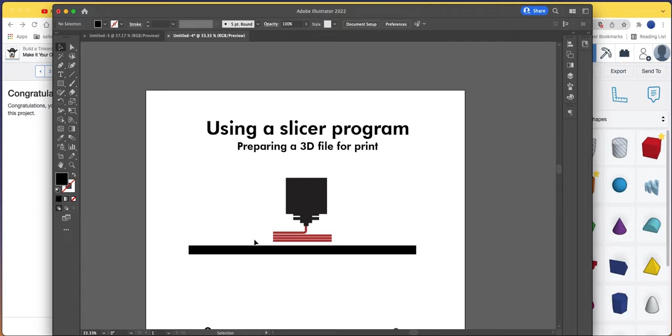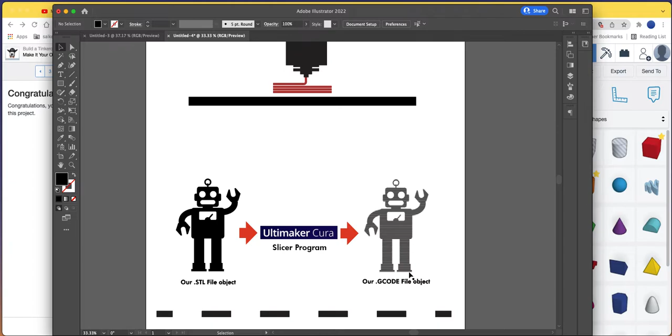A 3D printer lays out simple tiny lines of filament. It gets heated up in the extruder, comes out in noodle form, and gets laid down in the order you specify. So we take a design, like our STL file, save it, and pass it through the slicer program, the one we use is called Ultimaker Cura, to make our G-code file. That's our STL file broken down into a bunch of tiny lines so the 3D printer can plot, coordinate, and print out our design.

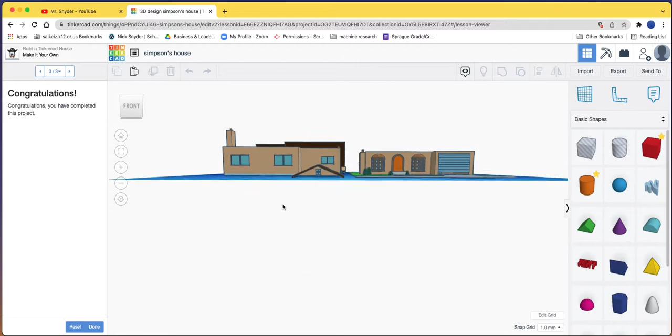Let's go through that right now. I'm going to use my Simpsons house, the house I made, and I assume it will either be the character project or the house project that you guys decide to print out when you get the chance. I think we're probably going to do voting, so only a couple of you will get to do the houses, but we'll use my house as an example today.

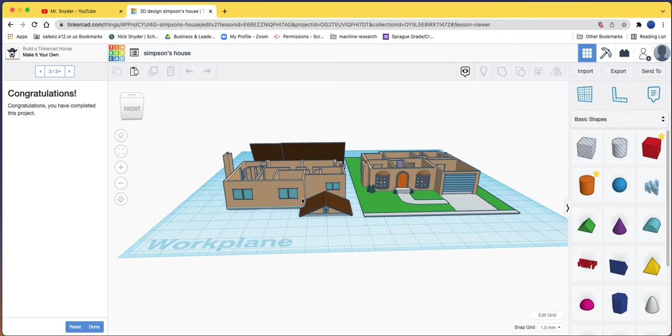First things first, I've made sure to lay all my pieces as flat as possible on the work plane. One of the other things we have to use is something called supports. If you have objects that are curved or have extreme angles, you'll need supports to actually support the material and make sure it doesn't fall over while printing. That definitely can happen, and it will - you'll get to experience it firsthand at some point, I'm sure.

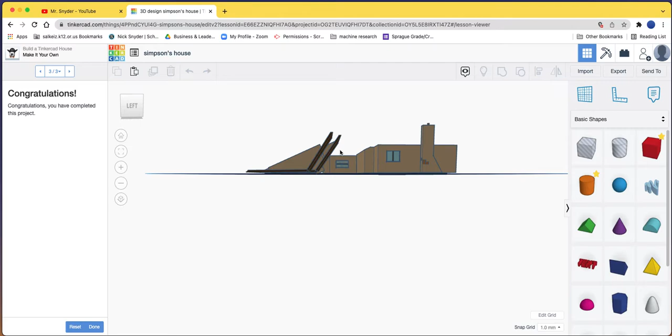The supports are really going to come into effect right here in my roof, where you can see this angle that comes down - those are going to be built up. I laid it down on the flattest, largest part of the roof I could to minimize my support usage, because the supports use the same filament. So the less supports you have, the less likely you are to run out of filament.

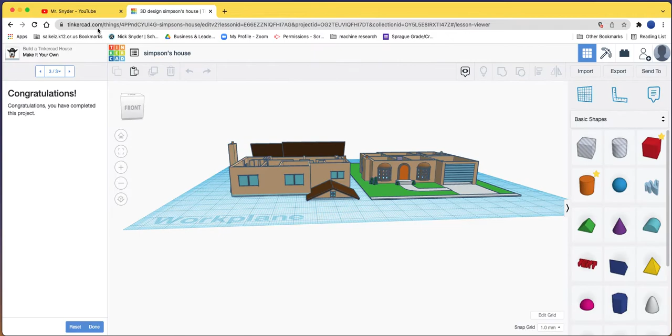So there's the house all laid out. I have exported it here already as an STL file, so we don't need to do that again. Let's go take a look at what we need to do.

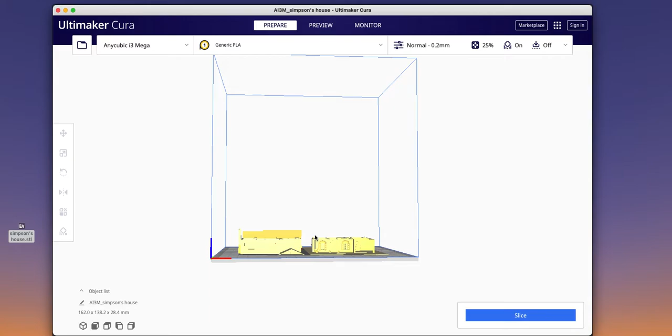You can go ahead and open up Cura - I have it right here, and of course there's my STL file. You can always go File, Open, Import a project, or you can just click and drag your design in here. So here's my file, there it is, all laid out - missing all the colors from before, but that makes sense.

Now that we have it in the file, we can take a look and prepare it for slicing. Before we do that though, there's a couple different things to look at. First off, I have specified what the printer is. When you first open Ultimaker Cura, it gives you a prompt showing a list of different kinds of 3D printers. We use the Anycubic i3 Mega in our shop, and that's what you're going to be using on this first project, so make sure you specify that.

Next thing, the Anycubic i3 Mega has a base size of 210 millimeters by 210 millimeters. A lot of you are designing your houses large, so you're going to need to shrink them down to make sure they fit on this work plane. You never want anything too close to the edge - even if it's 210 millimeters, you don't really have 210 millimeters to work with. You want to work on the inside of that space.

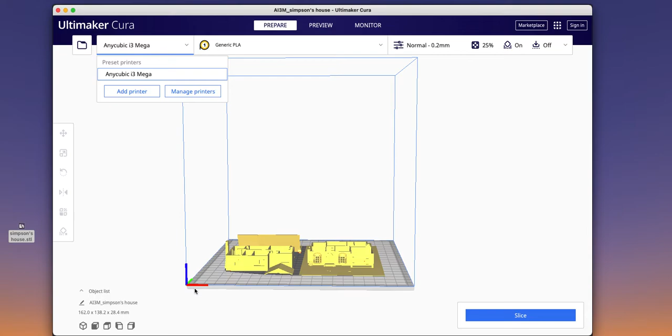So let's go work some of the print settings. The first thing you're going to want to do is work on the wall size here. I'm just going to leave it as default setting.

Infill is a pretty important one. If you need an object that is going to be put on, say, a bike or a car or something that might get hit or dinged or is going to be well used and worn, you might go for a higher infill. If you're making something as a prototype just to see if the shape and design works, then you might go for a lower infill. It's going to take a lot less time to print out.

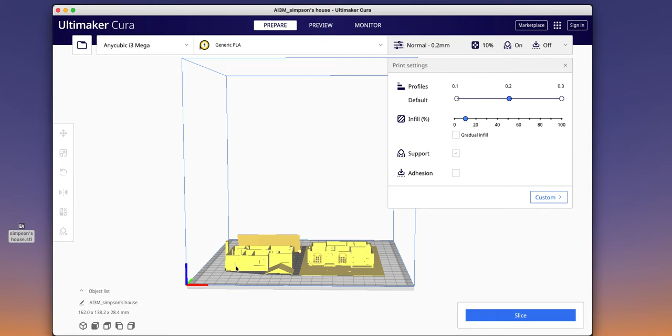So what I'm going to do is move this one down to a pretty low infill, since there's not a whole lot of infill space anyway, since it's mostly just walls. If you're doing a solid object though, you're going to want to consider that. The print time is going to be considerably longer the higher the infill is.

Supports. So once again, it says here, generate structures to support parts of the model which have overhangs. Once again, that will be my roof right there, so I want to make sure that's clicked.

Adhesion. So this is to print a brim or a raft. I like doing this every time just to make sure that the filament's working before I start getting into the print itself. And if you need to go to the custom settings, you can check that out. We're not going to look at that.

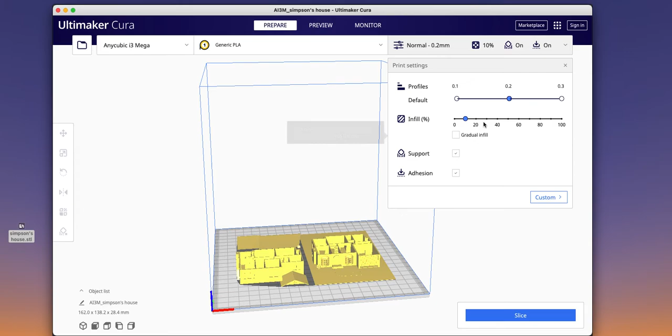But for now, this is pretty much how you should set up your house print. If you're doing your character design, you might want to go with a little bit higher of an infill. Otherwise, it's pretty easy to crush it.

So once you do that, you can go slice, and it's going to very quickly create your program into a bunch of little tiny lines.

And what's really cool is it's going to show the information here about your piece. So it estimates the time to do, like it says, inner and outer walls, all the different skins and parts of it. So ultimately, my house is going to take 4 hours and 54 minutes to print, even something that small. It's a long process.

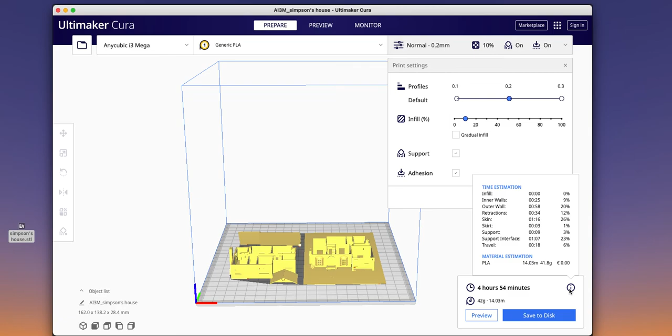It's going to take 42 grams of filament, or 14.03 meters. And if you specify the kind of PLA or ABS we're going to be using, we will be using PLA on this one. It'll show you how much it's going to cost in euros, interestingly enough. But I think you can set that to dollars if you really want.

So once we do that, we're going to go save to disk, and we'll save it onto my desktop. It's going to save as a G-code file right here as it specifies. There are other file types, but we're just going to be working with G-code today. So we'll hit save, and then it says save. And there we go. That's how to prepare.

Next thing you're going to want to do for our class is, once you've made your G-code, ask me for a little tiny SD card. I will give you that. You put your file on that SD card. That's what gets put into the printer. And then from there, you can select your print, and you're good to go. Good luck.